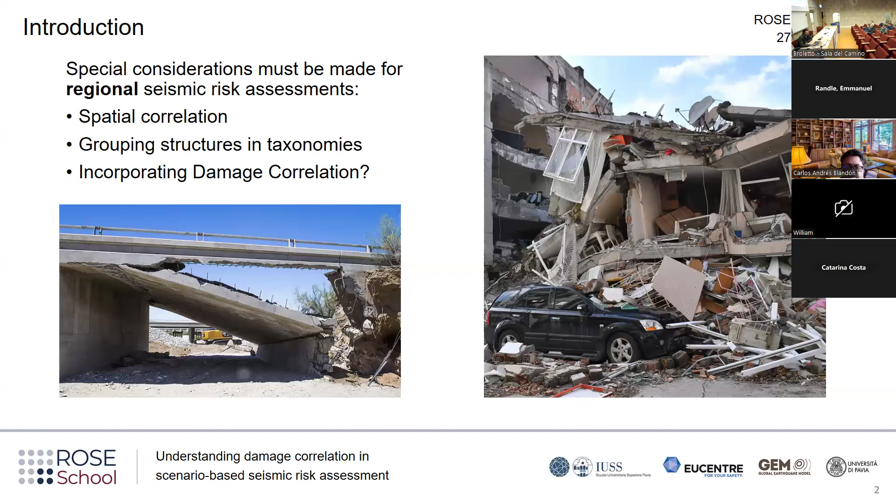We should also ask ourselves, we also need to consider some sort of damage correlation in the results, which is specifically what I'm going to be talking about today. So it is reasonable to believe that structures that were constructed in the same region probably share some characteristics in common, in a way that they might have some common strengths or deficiencies.

So for example, we can assume that there was a developer in a city that constructed many buildings. Probably the professionals involved in the construction of these buildings were the same, the building code used was the same. So as a consequence, if they made a mistake in the construction of one of these buildings, probably they also made that mistake in the construction of the other buildings. So the response of these buildings is correlated in a way - there's some dependency in the response of these buildings.

This is also very common, for example, in the case of overpass bridges in highways, because generally we can see that there's pretty much like a copy and paste of the same bridge in different sites, so we would expect these bridges to have similar responses.

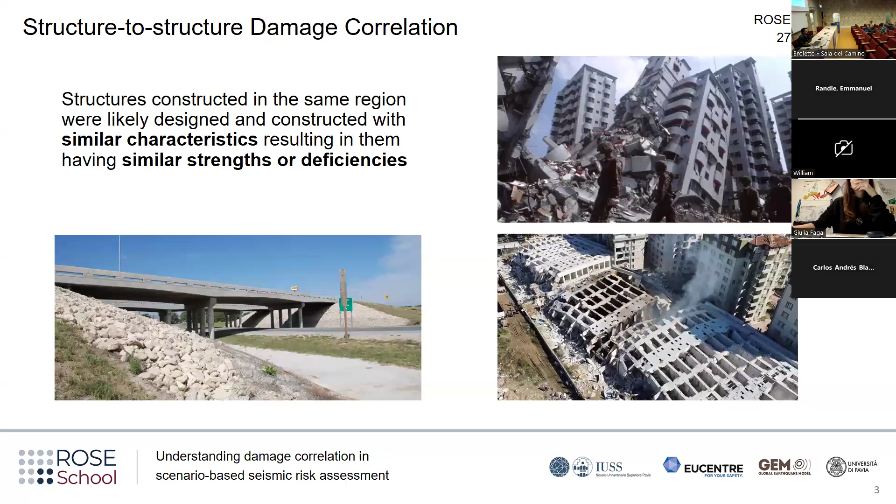The fact that this dependency exists doesn't necessarily mean that the buildings are going to have the same damage outcome. If we look at the pictures on the right, we can see that in the picture below, all of the buildings collapsed, but in the picture above, just one of the buildings collapsed. So it's not a matter of the buildings being similar meaning they will all have the same outcome. There's some sort of randomness in there, or some behavior in there, which is what we're trying to understand right now - what is this correlation, what causes this kind of behavior?

So in order to understand better the implications of considering this variable in the analysis, we will look at this hypothetical case in which we have many buildings, all of them belonging to the same taxonomy in a region, in a way that we have just one fragility function for all of them.

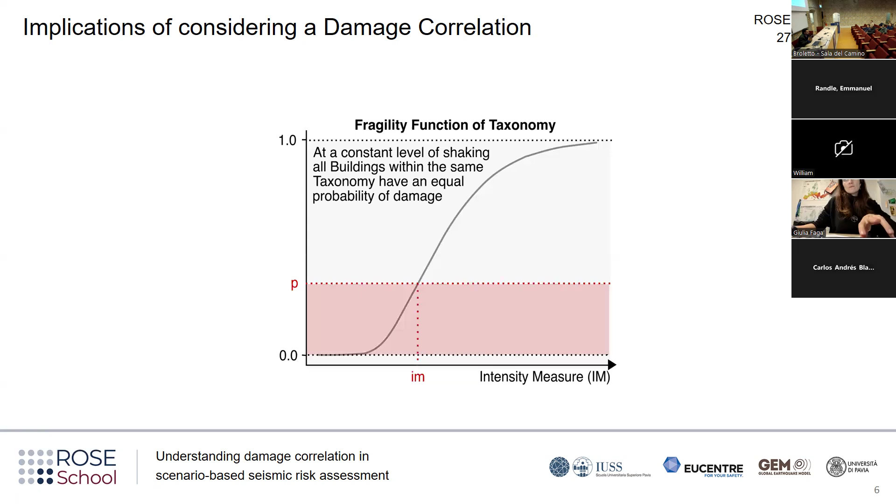If we also assume the hypothetical case that all of these buildings have a constant shaking, as if they were all located on the same site, they will all have a common probability of exceeding that damage state. Since we're considering just one damage state here, exceeding this damage state means resulting in damage.

This is how the analysis is usually performed when no correlation is being accounted for. What is done is we sample a set of n times k independent uniform numbers to assign the damage state to each of the buildings, n being the number of buildings that we're analyzing, and k being the number of trials we're performing on the same scenario.

So what is done is we just sample a random number between 0 and 1, and in this case, for example, that number is larger than p, so we say that the building is not damaged. We can do then another independent uniform number here.

This is a Monte Carlo simulation of a Bernoulli trial. A Bernoulli trial is a process in which we have two possible outcomes and one probability of observing that outcome. So that's why this is a Bernoulli trial.

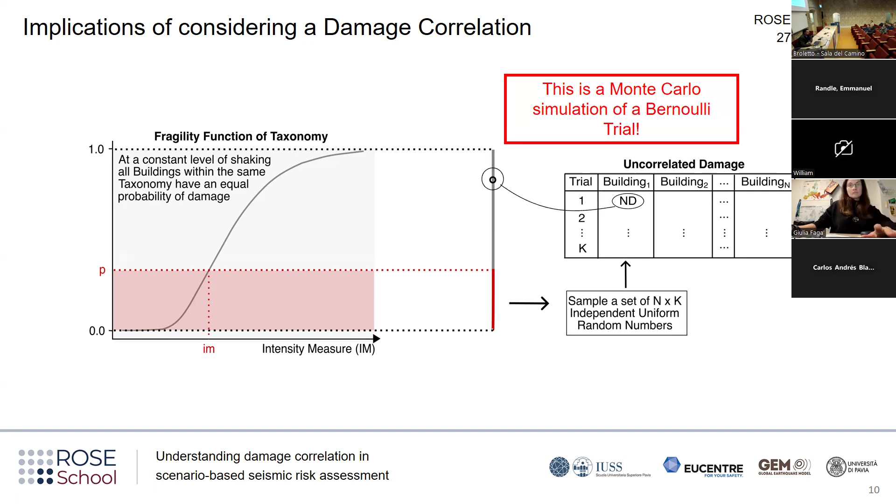As I was saying, we can generate a second independent number. In this case, if it is lower than P, we can say that the building is damaged. We can do it again with another independent number, and in this case it is larger than P, so the building is not damaged.

We can repeat this many times until we have a table like this one, which we can use to estimate losses, perform some statistics, determine the probability of exceeding a certain number of damaged buildings, etc.

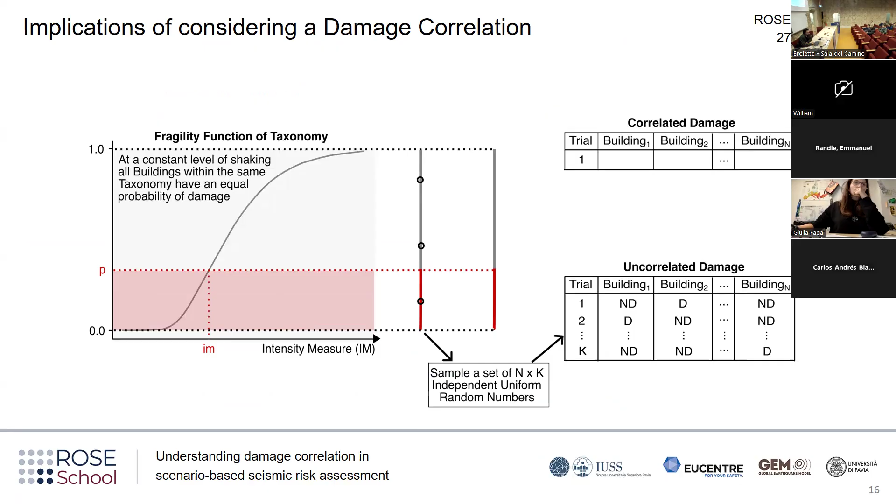Now, if we want to consider a correlated damage case, we will need to sample collectively all of the uniform numbers being used for each trial simultaneously, in a way that they represent the correlated structure of damage we expect this building to have.

So, for example, here we will generate all of the random numbers for the buildings, and we will see that all three of them result in no damage. We repeat this again for all of the trials we're running, and we get a table like the one we got before.

If we perform vertical statistics, we can see that for both cases, the proportion of trials for which any building resulted in damage tends to be equal to P. The same thing happens if we perform horizontal statistics for the uncorrelated case.

However, for the correlated case, this doesn't happen. The proportion is not going to be equal to P, since we're going to observe more cases in which either more buildings collapse, fewer buildings collapse, or maybe all of them collapse, because the response is not independent, it's correlated.

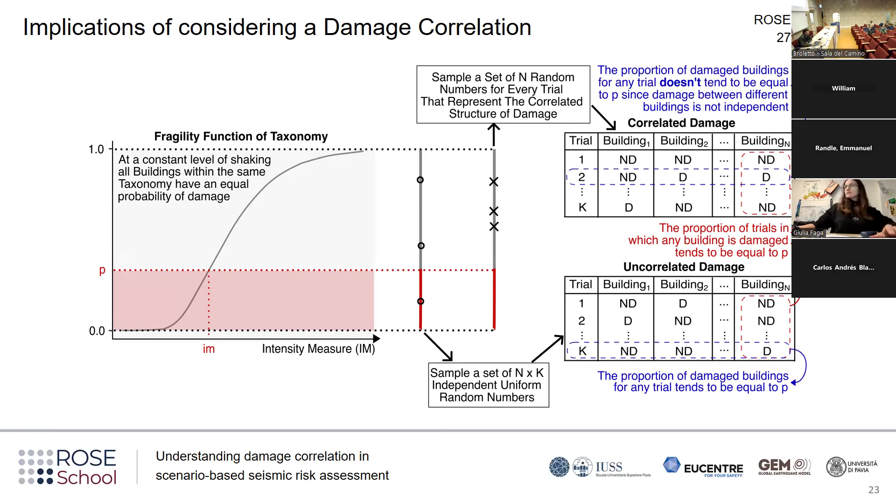Now, the question is, how can we estimate this correlation? How can we generate this set of uniform random numbers that represent the correlated structure of damage?

If you recall what I said before, the process of sampling each of these damage outcomes is a Bernoulli trial. So we could use the equation for estimating the correlation of Bernoulli trials, which is the one I'm showing on the slide. It is a function of the marginal probability of damage, in this case of each of the buildings.

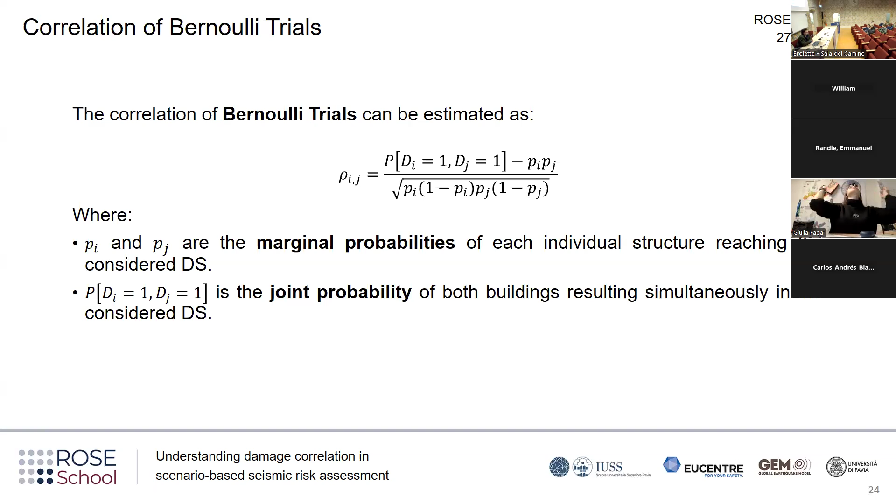So it's just the probability from the fragility function, the probability of each building independently resulting in that damage state. It's also a function of the joint probability of damage, which is the probability of both buildings resulting simultaneously in that particular damage state.

We believe we can estimate that joint probability distribution from the results of nonlinear time history analysis, either from MSA, multiple stripe analysis, or IDA, with some implications from each of them that I will discuss later, if we use the same set of records for both buildings.

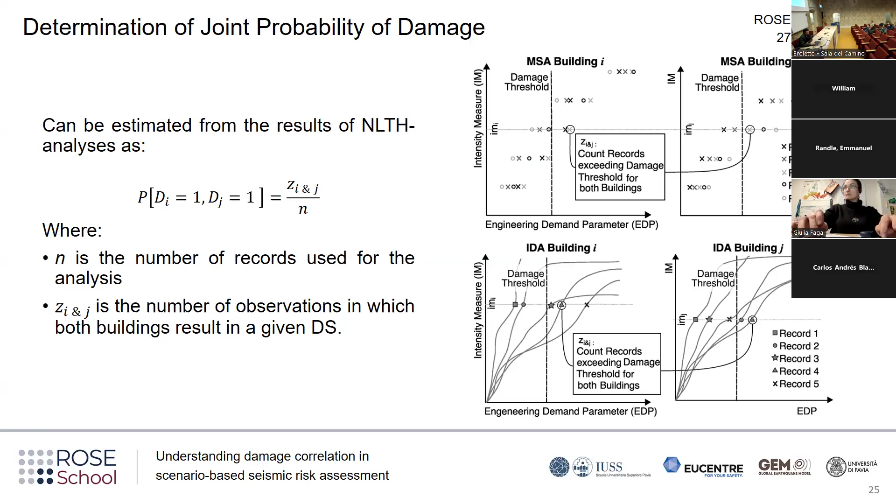We can then, as we do for determining the marginal probability of damage, count the cases for which a record caused both buildings to exceed the considered damage threshold, and in that way estimate that joint probability. I will talk a little bit later about the implications of using both methods, but that is the general idea.

So we decided to apply this in a case study to better understand the implications of including this variable in the analysis. We performed a regional assessment of mid-rise concrete frame buildings in the province of Caserta in southern Italy.

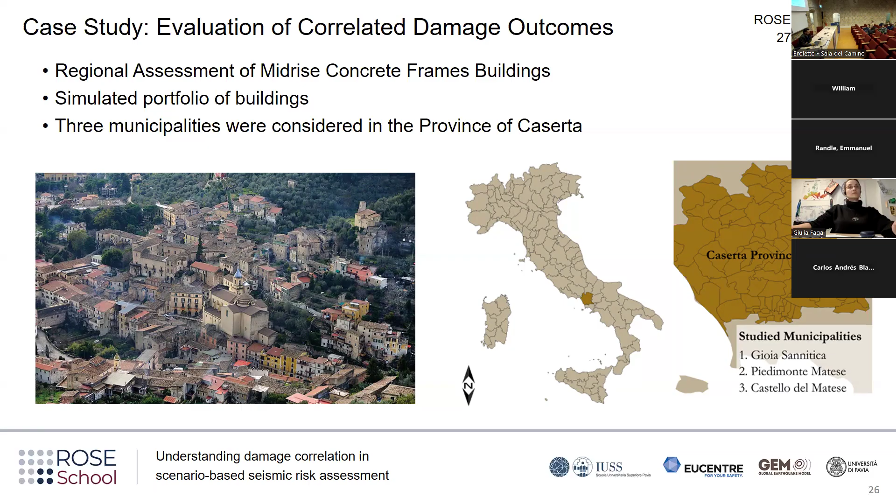We used a simulated portfolio of buildings, and we considered 3 different municipalities that share very similar high hazard: Gioia Sannitica, Piedimonte Matese, and Castello del Matese, all included in the Caserta province.

We wanted this case study to be as realistic as possible, so we took the real exposure model for these 3 municipalities from the European seismic risk model, and found there are 62 mid-rise concrete frame buildings divided into 3 different taxonomies.

The exposure model gives us all of the buildings in that municipality lumped into a common site. So we distributed them geographically using the spatial disaggregation algorithm developed by GEM, based on the distribution of the population, so we would have an assumed, realistic location of where all of these buildings could be.

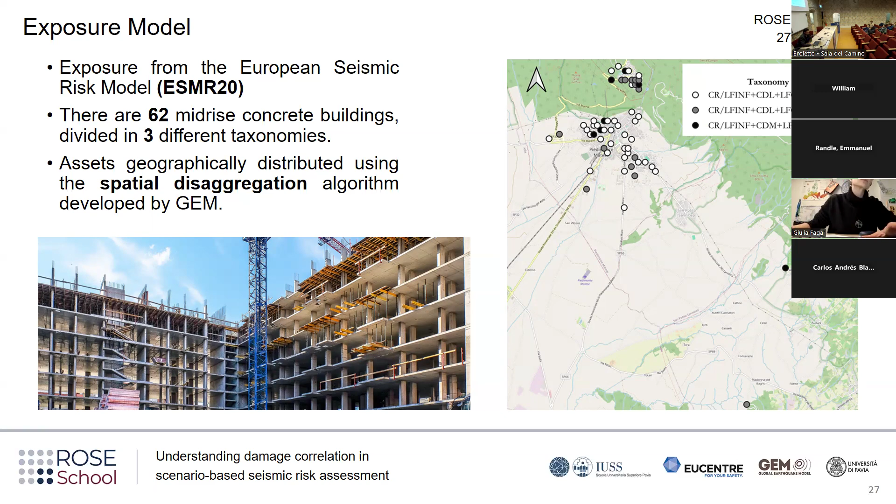We then use the built environments data design service to simulate the portfolio of buildings. It uses Monte Carlo simulation to sample the characteristics of the buildings from a real characterization of the buildings in the area, based on the characterization developed by Corlito and De Matteis in 2019, so the simulated portfolio would be as realistic as possible. We then assign a random location to each building based on the spatially disaggregated exposure model, so we have for each location a specific model of the building assumed to be there.

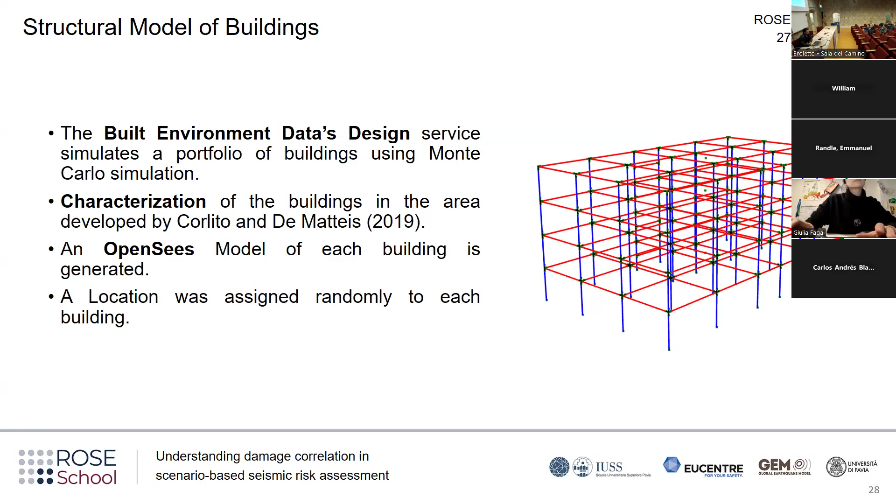We perform a hazard analysis using a PSHA on OpenQuake in order to select records for the nonlinear time history analysis. We considered many return periods, and selected 40 records for each using the conditional spectrum method. Since we needed the same set of records for all buildings, and wanted them representative for all of them, we chose as an IM the average spectral acceleration centered around the average period of all the buildings, so we could capture the possible expected ranges in the response of all the buildings.

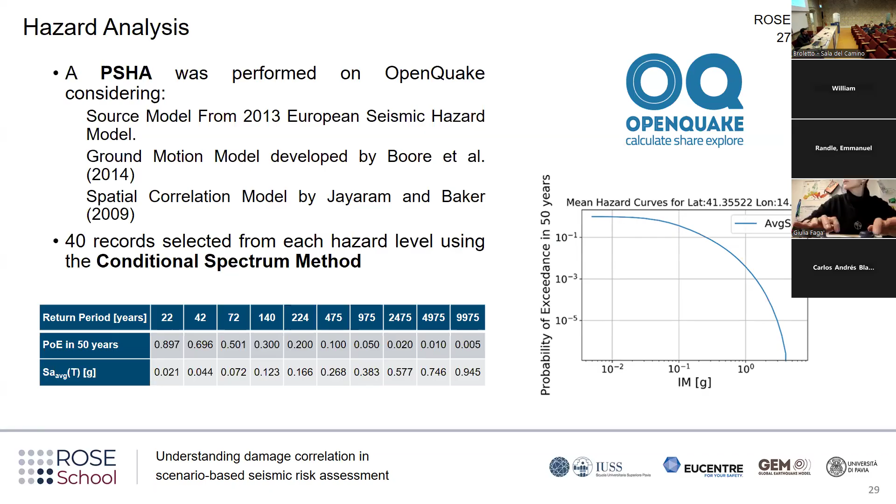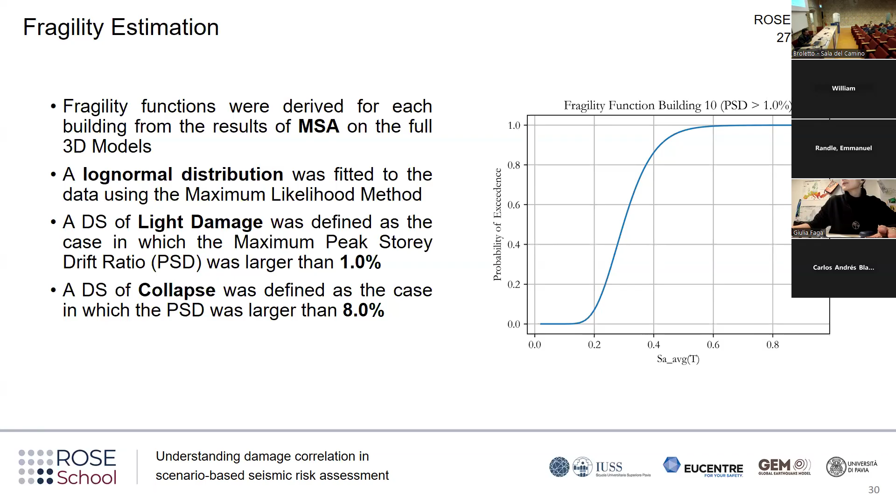For the estimation of the fragility functions, we performed multiple stripe analysis on the full 3D models of the buildings, then fitted a log normal distribution using the maximum likelihood method. We considered two damage states: a light damage state defined as the case where the peak story drift was larger than 1%, and a collapse damage state defined as exceeding a peak story drift of 8%. We derived fragility functions for all buildings in these two damage states.

We then estimated the damage correlation with the equation and methodology shown before. As I mentioned, we could use results of multiple stripe analysis or incremental dynamic analysis. Usually MSA is preferred because we use records that are hazard consistent for all hazard levels. However, this means we only have results for the obtained EDPs at some fixed intensity stripes, and the records differ for each stripe, so we cannot interpolate results between intensities. This means we could only use MSA for estimating correlations when all buildings have exactly the same intensity, coinciding with one of the intensities used for MSA.

As an alternative, we can use IDA, which might have some bias due to excessive scaling of the records, but this always happens with IDA. Since the same set of records is used for all intensities, and you progressively scale them until reaching collapse, you can actually interpolate the EDP value for any IM. This allows us to calculate the correlation for cases where the intensities in both buildings are different.

Since we're going to perform IDA, we wanted to try the impact of using equivalent single degree of freedom oscillators instead of running the analysis on the full 3D model, because that would significantly reduce the computational demand of the methodology. So we wanted to see what would happen if we made that simplification.

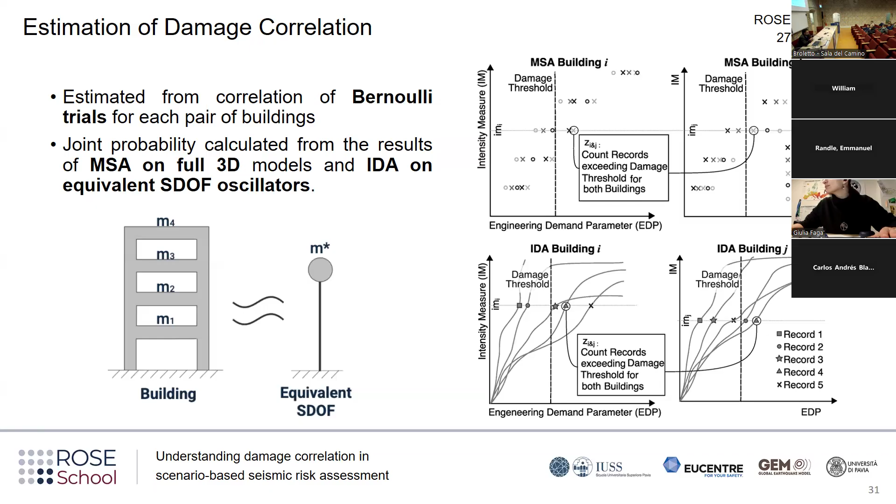To avoid excessive scaling, we chose to use the same set of records selected for the 475-year return period. So when looking at that intensity, the records used are exactly the same with the same scale factor, and the only difference in results comes from one case using the equivalent SDOFs and the other performed on the full 3D models of the buildings.

Considering that, we evaluated three different cases. The first was constant shaking with an intensity equal to 0.27 G, corresponding to the 475-year return period. This means that for this case, the only difference in results comes from the use of the equivalent SDOFs.

A second case used a higher intensity of 0.75 G, to see the difference in results when also using IDA instead of MSA. The third case was based on a rupture scenario, used to see the impacts on results in a more realistic case where intensities were different across all the buildings.

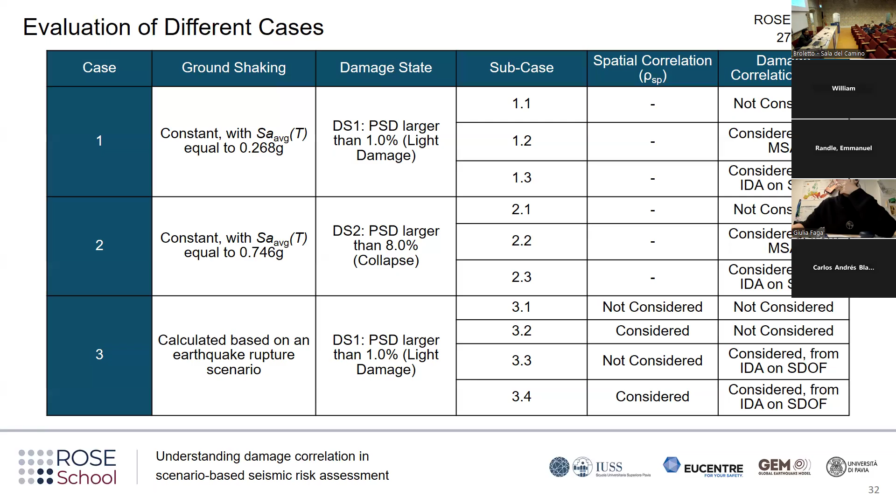For the results of case one, we estimated the probability of exceeding a different number of damaged buildings, calculated after performing 100,000 iterations of the same case. We counted how many times each number of buildings was exceeded.

The number of damaged buildings was larger than the considered number of buildings, and that's how we obtained those curves. We can see that overall, the mean value is pretty much the same, and the median value is pretty much the same. But there was a significant difference in the dispersion of the number of damaged buildings.

As a consequence, the tails of the distribution are also different. If we ignore the correlation, which is what is usually done, we underestimate the probability of observing a large number of damaged buildings. So if we look at the probability of observing more than 40 damaged buildings from this scenario, if we ignore the damage correlation, it will be around 7%. But if we consider the correlation with MSA, in this case with the full 3D models, it will be 40%.

We can see that using the SDOFs is slightly overestimating the impact of the correlation. But in any case, these results, even using the SDOFs, are better than completely neglecting the correlation, which is what is usually done. Now for case two, the results are very similar.

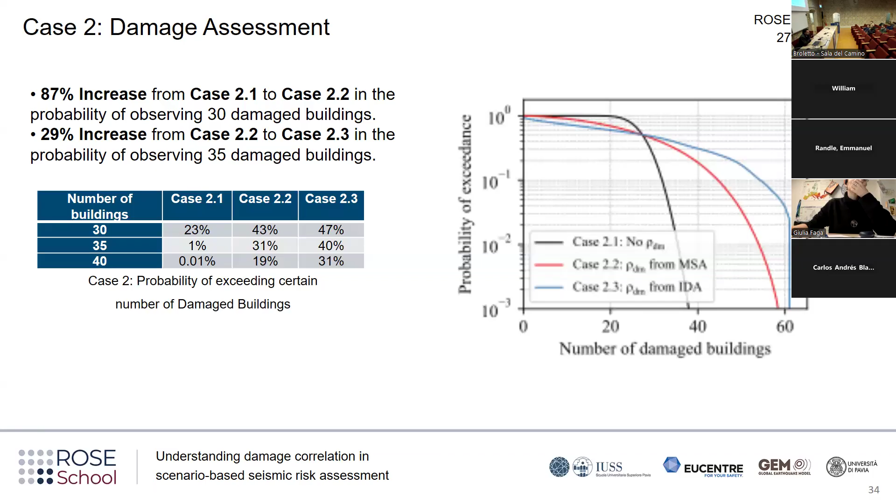Now for case three, we consider this rupture, selected from the 475-year return period hazard. Because we know that for this level of intensities the results from MSA and IDA are similar, we wanted to decrease as much as we could the impact of using a different method. This corresponds to a scenario with a magnitude of 6.25 located at 5 kilometers from the point of mean coordinates of the buildings.

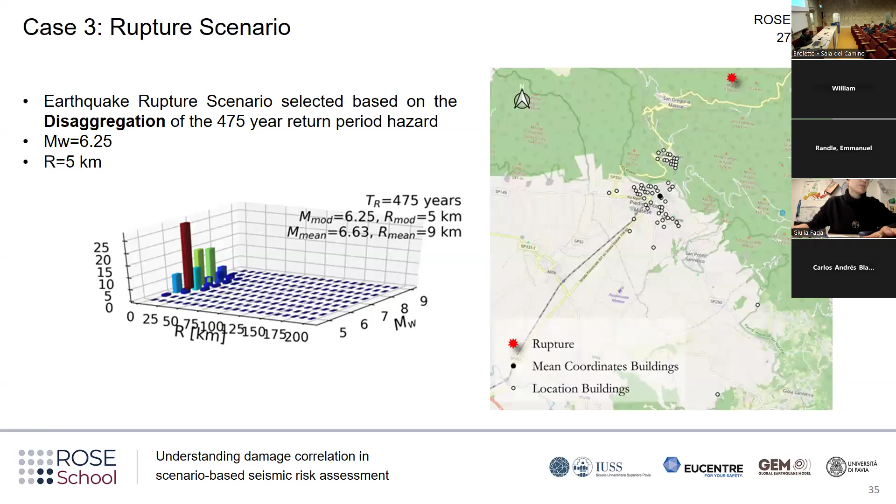For this case in particular, we saw that spatial correlation has a very big impact, probably because all of our buildings are located too close to each other. So spatial correlation is very significant, but in any case, we can see that there's also an impact if we consider just the damage correlation by itself.

It's important to consider the correlations because, for example, the government of the province might see this as the worst case scenario and say that they are prepared to fix 45 buildings. And they want to know how likely it is that that money is enough.

If no correlation is used, the probability of them not having enough money would be around 6%, so they might say that it's fine. But if we consider all of the correlations, that probability might increase to 36%, which maybe is not that fine anymore. That is why it's important to consider both the spatial correlation and the damage correlation into these type of assessments.

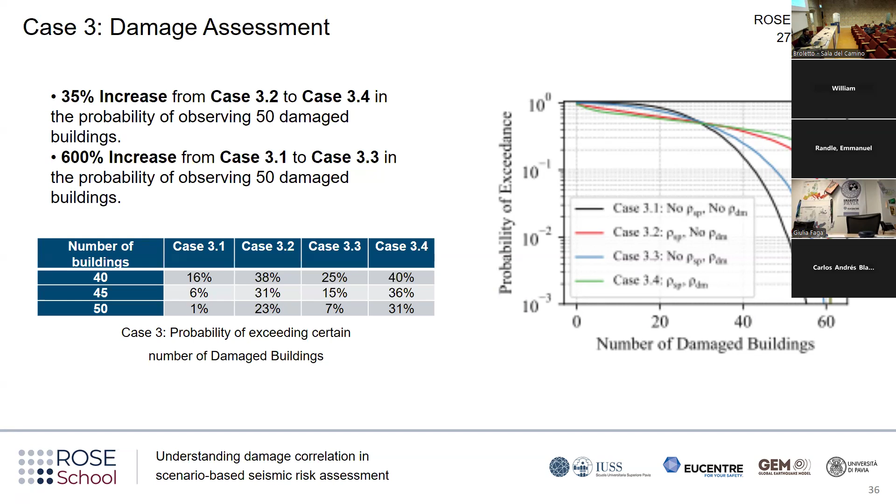So as a conclusion from this study, we can say that incorporating the damage correlation significantly impacts the variability and shape of the distribution of number of damaged buildings. Including this variable also allows us to have more accurate results in order to plan for mitigation strategies and for risk preparedness awareness.

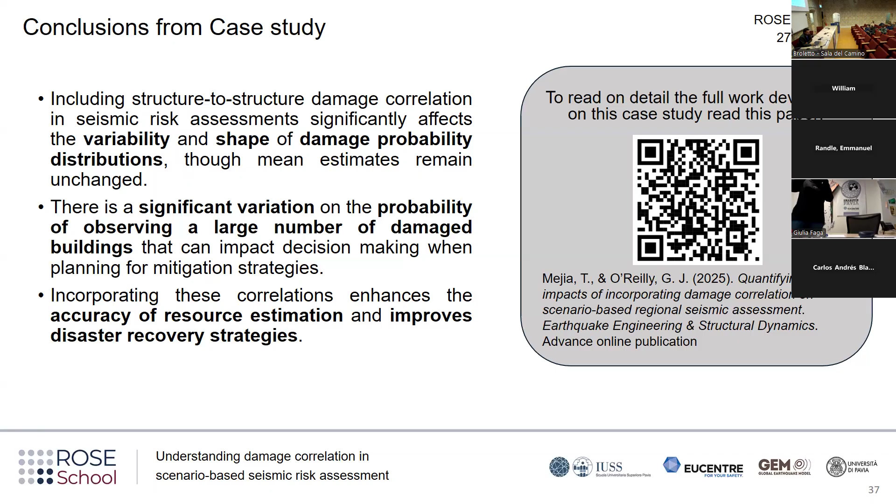Now let's talk about some of the considerations from this work in order to see how we can move forward. The first thing is that we found that for some cases there were negative correlation values, which is a little weird because we're working with buildings that have very similar dynamic characteristics and behavior.

So we should look further into why we're getting these negative values, maybe it's an issue of needing more records to quantify the general probability distribution. The second issue is that this methodology was based on a building-specific approach, assuming we have nonlinear models of all the buildings in the region, which we know is not very realistic, and we don't have these nonlinear models. So we would have to develop mathematical models to estimate the correlation directly from building characteristics. However, this can be very complicated because we need to guarantee that the correlation matrix obtained is positive semi-definite, a property of correlation matrices meaning all eigenvalues are larger than or equal to 0, and achieving this from these matrices might be quite complicated.

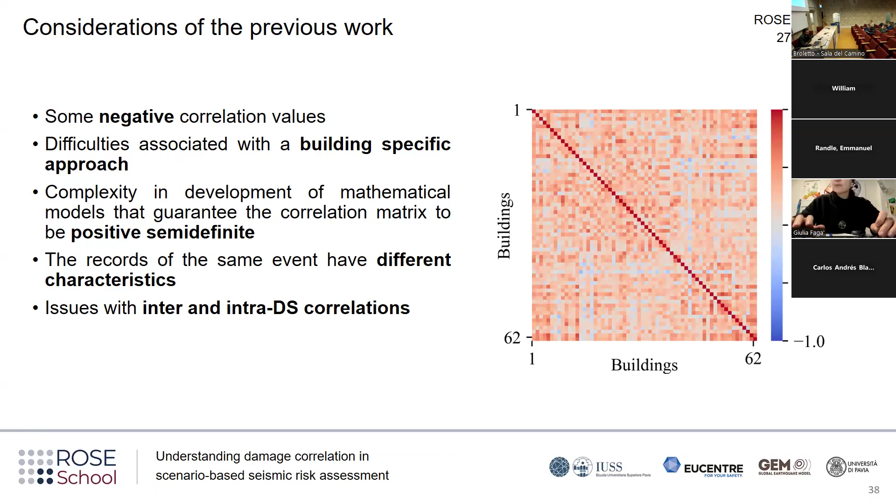So for that, we consider using an EDP-based approach that is equivalent to the traditional damage state approach. In this approach, we sample the EDP directly for each building from a given probabilistic model of the EDPs. After sampling the EDP value, according to which damage threshold was exceeded, you can assign the corresponding damage state for each building, or you could also estimate directly the losses with a story loss function, for example. By generating a set of correlated EDPs, we would intrinsically be considering all types of possible correlations between all the different damage states.

One of the drawbacks of this approach is that you need the probabilistic model of the EDPs. If you're deriving the fragility function from cloud analysis, for example, an intermediate step is developing a demand intensity model, which is a probabilistic model for the EDPs. So even though it might not be published, we know it exists. But if you're working with empirical fragility functions, we don't have such a model, maybe for all the taxonomies. Let's say that for now we're going to consider that we have the demand intensity model for all the buildings and all the taxonomies.

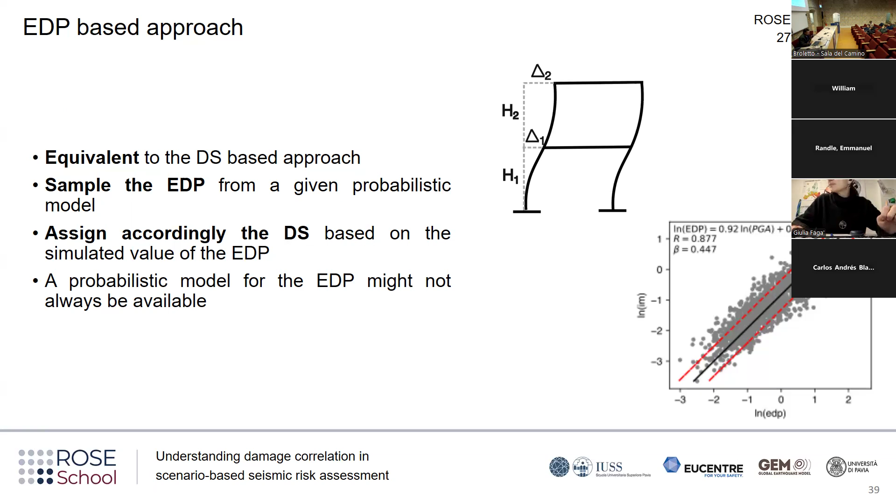So now, in order to understand how we can deal with the problem, let's try to see what would be the ideal approach for estimating the correlation. Let's say we know that the rupture we're seeing on the slide is one of the ruptures we need to consider in our scenario-based assessment. Let's say also that we have all of those sites, but specifically two buildings, building A and building B, located on site N and site M, respectively.

Let's also consider that building A and building B are instrumented, so we can know when an earthquake occurs what was the actual observed EDP in that building. So let's say we had this rupture and recorded the observed EDP on both buildings. Now let's say we can have another realization of exactly the same rupture, and we could also record the observed EDP for that new realization. If we repeat that many times, we end up having a vector of observed EDPs on both buildings for that specific rupture.

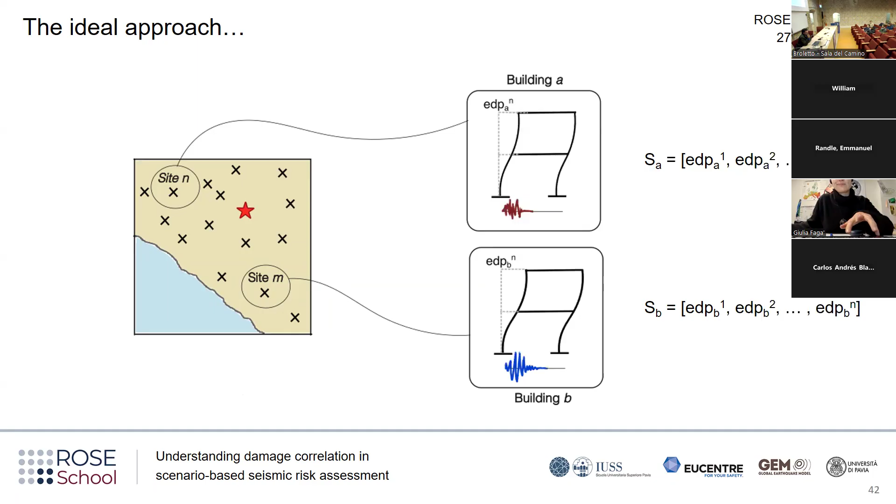We could then estimate the Pearson correlation of those two vectors, giving us a real calculation of what is the correlation in the EDPs of those two specific buildings located at those two specific sites for that specific rupture.

We could repeat it then for all of the buildings, so we will have a correlation matrix of all of the buildings in our region for that rupture in particular, and then we could repeat it for all of our ruptures. In reality, this is not applicable because, first of all, we don't have many different realizations of the same rupture. We just have one. Also, we don't always have buildings that are instrumented, so we cannot estimate the correlation from that. So it's practically impossible to use this ideal approach.

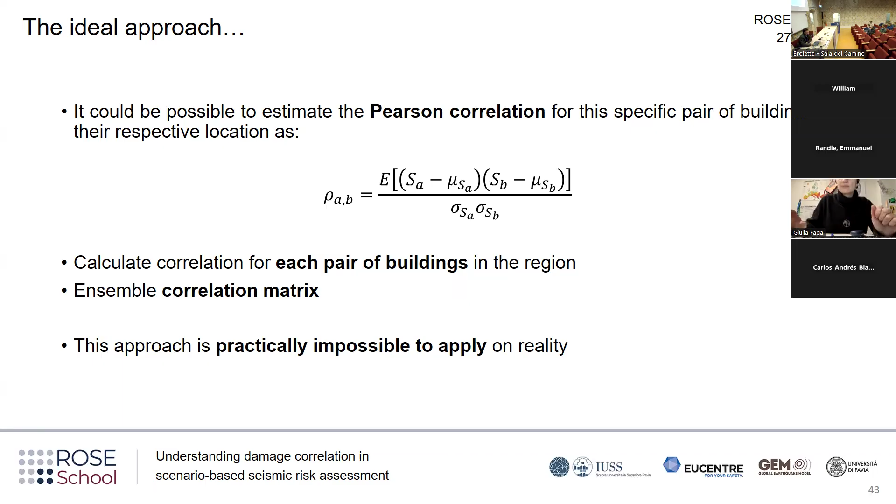This is why it is ideal. This is equivalent to what is done in spatial correlation problems. Also in spatial correlation, we would like to have many observations of the intensities in our sites for the rupture we're considering. How they deal with that in spatial correlation, since they also don't have those observations, is by relying on the ergodic assumption.

What that does is consider that the residuals of IMs observed at different earthquakes, locations and times have properties equivalent to the ones you would observe on many observations in time of a given event at two specific sites. So they rely on that assumption to develop mathematical models of the spatial correlation that are generally a function of distance.

To understand it better: if we have two sites separated at a distance of 1 kilometer, the correlation in the residuals of the intensities of those two sites is going to be similar to the ones you would have in many other sites also separated at 1 kilometer for many other earthquakes that happen in many other regions. So they use those observations of earthquakes in other regions to estimate the correlations in the region they would like to have it.

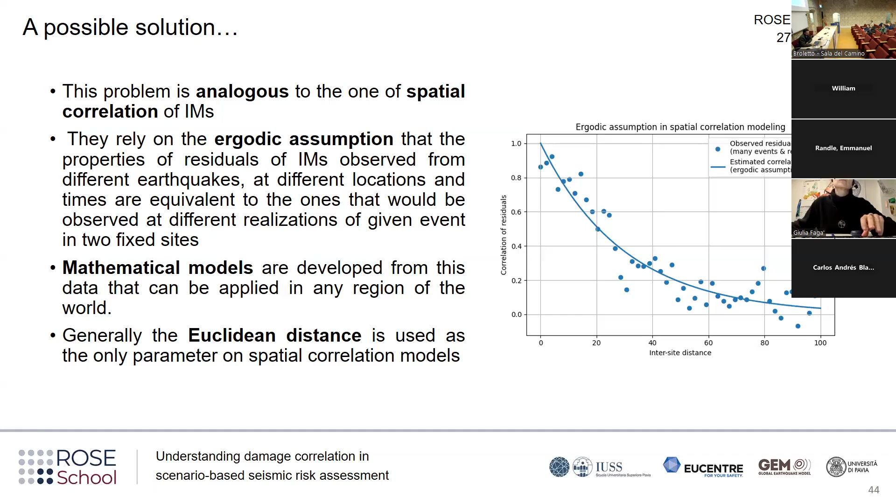So we could also rely on this assumption for the estimation of the correlation in the performance, or in the EDPs. If you heard, I talked about the residuals of the intensities. So it's important to say what these residuals are - they are a variable that represents how many standard deviations from the mean an observed value is.

Then you have a probabilistic part, that is a function of the residual multiplied by the dispersion of the demand coming from the demand intensity model. So these residuals are usually considered as standard normal variables, so they have a mean equal to 0 and a standard deviation equal to 1.

It is important to consider the correlation of the residuals instead of the correlation of the absolute values, because by correlating the absolute values you can inflate the value of the correlation - you might be observing two points that have very similar response because the mean is similar, because the expected value is similar, but not necessarily because the random part was similar. So by correlating the residuals directly, we are accounting for that.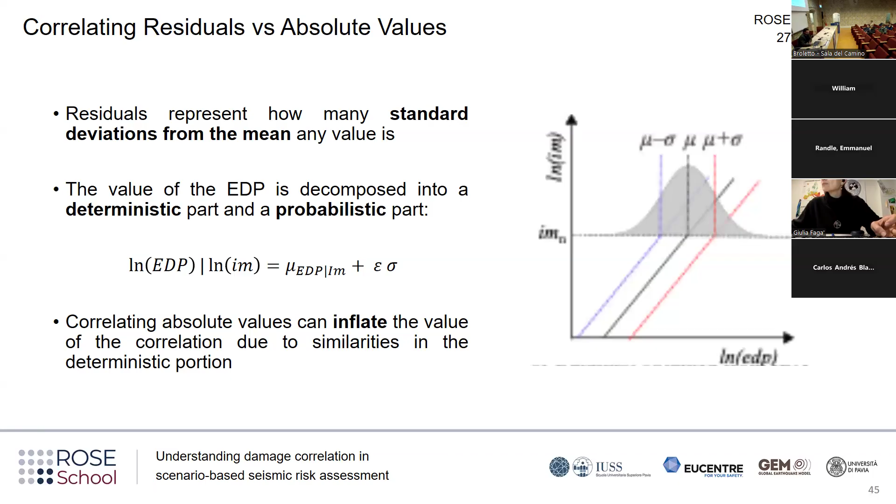As I said before, we could use the ergodic assumption to estimate the correlation of the residuals of EDPs. For that, we could use real observations of real earthquakes that we might find. So for example, let's say we have this earthquake and we have many stations that recorded it, and we have a specific record for each of those stations. So we also know what was the actual intensity in that site.

If we take, for example, one building, let's say building A, and we have a nonlinear model of that building, we can perform a nonlinear time history analysis on that model for all of the records from all of the stations that we have for that rupture in particular. And in that way, we will have for each station a pair of intensity and observed EDP for that building. We can then use that.

If we then have a demand intensity model of that building and we develop that model, we could calculate what is the residual at each of those stations. So we would end up having a map for a specific earthquake of what was the residual of that building.

And we can then use some geostatistical tools to derive, for example in that case, a model that is a function of distance. So we will know, if we have the same building located on different sites at a certain distance, what will be the correlation of that same building.

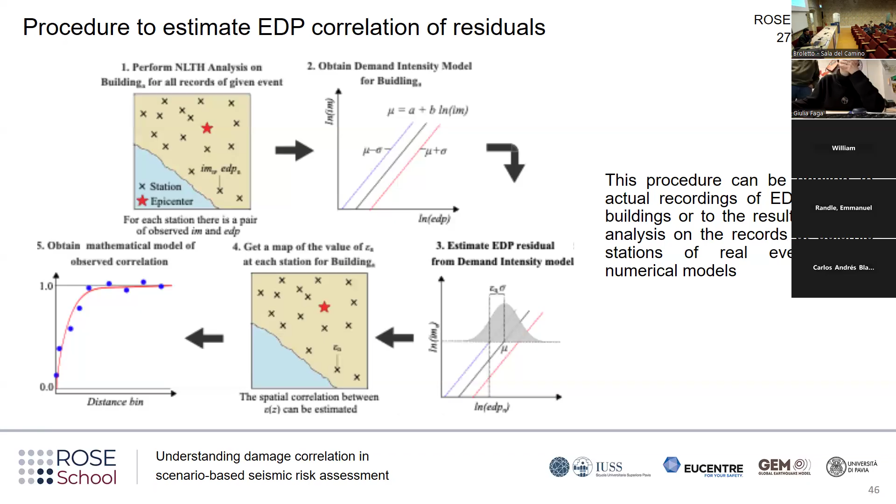We wanted then to try with an example to see what the implications would be of using this EDP-correlated based approach. So for that, we took a simulated portfolio of 80 buildings, all of them Turkish buildings with high ductility, constructed between the year 2000 and 2018. They were also obtained with the BED design service, the same one I used before, but with some modifications performed specifically for Turkish buildings by Serkan, another PhD student here.

We then performed a cloud analysis on all of these 80 buildings using equivalent SDOF nonlinear oscillators, and we used 500 records that were selected with an unconditional approach. We scaled them two more times to obtain more points in the nonlinear range. In that way, we derived building-specific demand intensity models for each of the buildings. I'm showing you, for example, the demand intensity model for building 50, and we did that for all of them.

Then we combined all of the demand intensity models to obtain a demand intensity model for the whole taxonomy that accounts both for the intra-building variability, which in this case is just the record-to-record variability since we didn't consider any other source, and the inter-building variability, to account for how different the results could be given variability in the characteristics of the buildings.

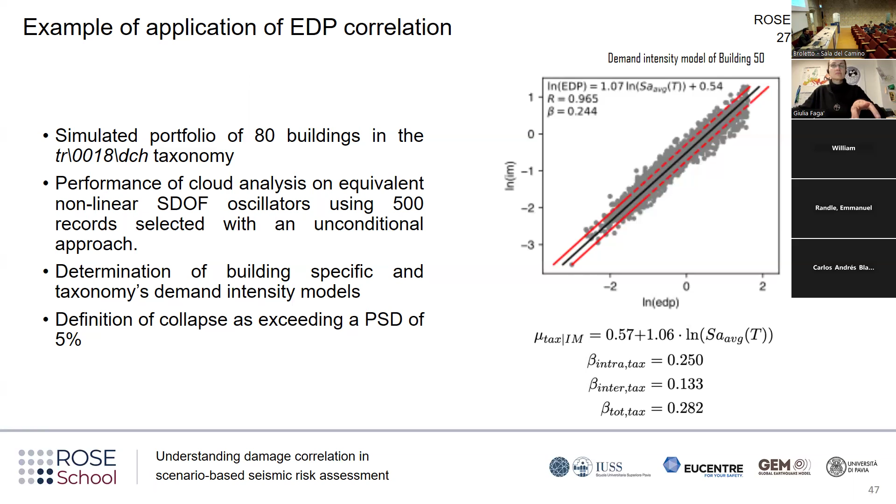As I said before, these demand intensity models are conditional on non-collapse, so the collapse cases must be considered separately. For that, we developed a collapse fragility function for each of the buildings specifically. We fitted the equation shown, performing a logistic regression to fit the A0 and A1 parameters to the data that resulted in collapse from the cloud analysis, and with that equation we found the parameters of the fragility function.

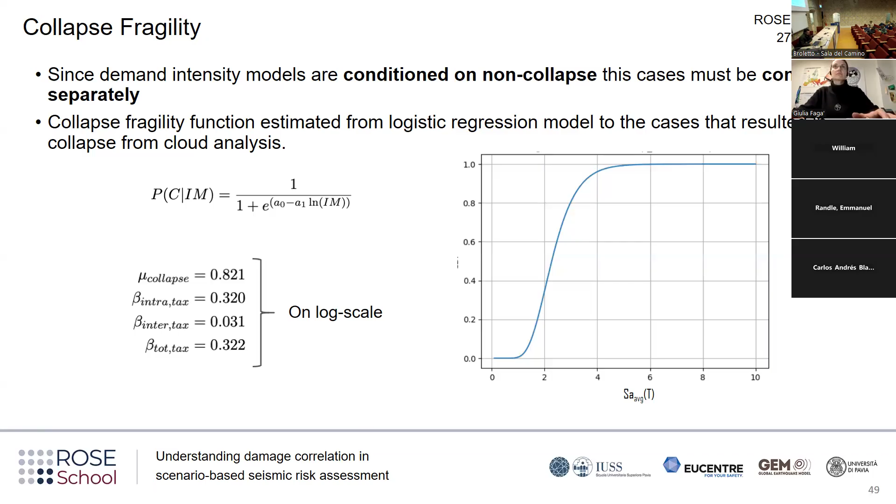And also in this case, we combined all of them into a taxonomy-level fragility function, considering both the intra- and inter-building variability.

We did the assessment for the Chichi event that happened in 1999 and had a magnitude of 7.6. Since this event has many, many records, like 400 records of the real experienced time history, we performed a nonlinear time history analysis on all of our 80 buildings using all of these records. In that way, we could obtain the residual EDP, which in this case is PSD, for all of our buildings.

In this case, what we did was just assign to each of those stations a random building in a way that we could have a real simulated, but realistic damage situation. So we will know for each of the buildings located at each of the stations what was the actual observed PSD.

We consider then for the assessment these correlation models. For the collapse cases, we consider one that is a function of the Euclidean distance between the buildings and the absolute difference in the periods of vibration of the buildings. And for the non-collapse cases, we consider one that has these two variables in addition to the absolute difference in the yield acceleration of the buildings, and one that is just a function of the absolute difference in the period and the absolute difference in the yield acceleration.

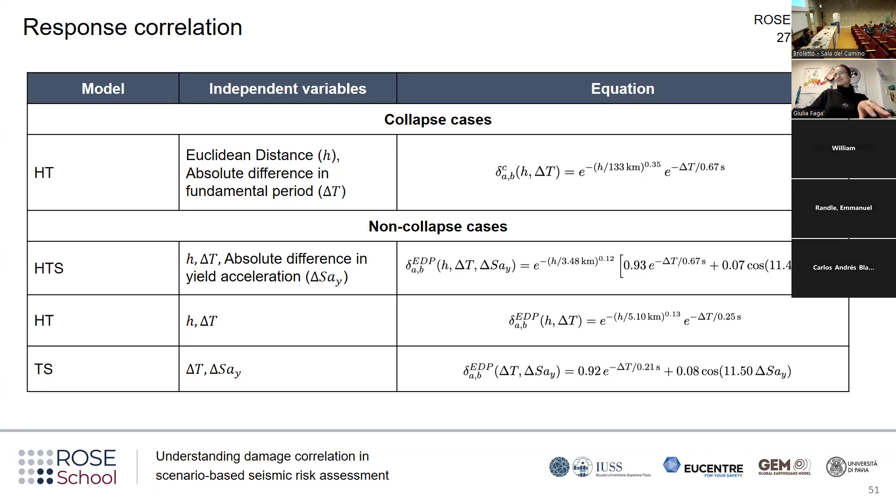I will not discuss right now where these models come from. Let's just say that these are the sort of models that we would expect to use in this type of assessments. And these models guarantee that the resulting correlation matrix is positive semi-definite. So they satisfy that condition.

We performed then the damage estimation. We use the real ground motion field of the Chichi earthquake. So here we're not considering any source of variability in the ground motion fields. We're using the real intensities that were recorded for that event. And we are just doing the assessment for the damage outcome of the buildings.

So we consider a damage threshold of 0.5%. What we did was, just for the real damage, like I told you before, we consider a random building located at each of the stations. We just checked how many of those buildings were exceeding a PSD of 0.5, and that's what we're considering as the real damage case. We found that was 75 buildings.

Then for the assessment, we just sampled the EDPs of all of the buildings and the collapse cases of all of the buildings, and we're estimating the probability of exceedance, as we did in the first case study. So we can see that the probability of exceeding the real damage that we observed, when no correlation is considered, is 0.25%, which is very low. It's almost like we would be saying that observing the real damage was impossible.

But if we consider the HT or the HTS correlation models, that probability increases to 20%. So the real observed damage becomes more likely to occur. And if we consider the TS model, it increases to 30%, which is even higher. However, we can see that the TS model is very correlated because we're not considering any decrease in the correlation with the distance of the buildings.

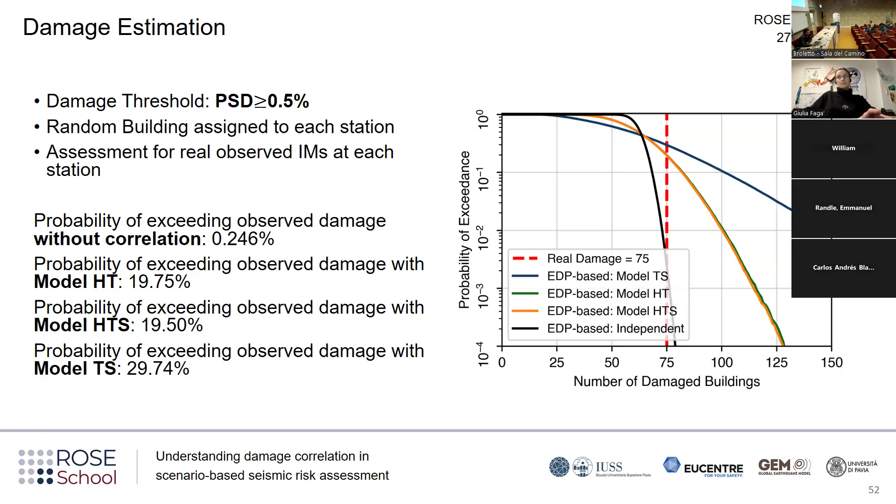So the ongoing work, what we have to do right now, is actually develop the models for the EDP residuals or the collapse cases, for example. Again, we need to guarantee that these models yield a positive semi-definite correlation matrix. And right now we're testing the use of Bayesian inference to fit these models, considering multiple variables.

As a spoiler, the models I used for the assessment actually come from some testing we're doing right now with this Bayesian inference. So they don't come from nowhere, but I didn't want to talk right now about how we developed them because it's still ongoing. We're still tweaking some things.

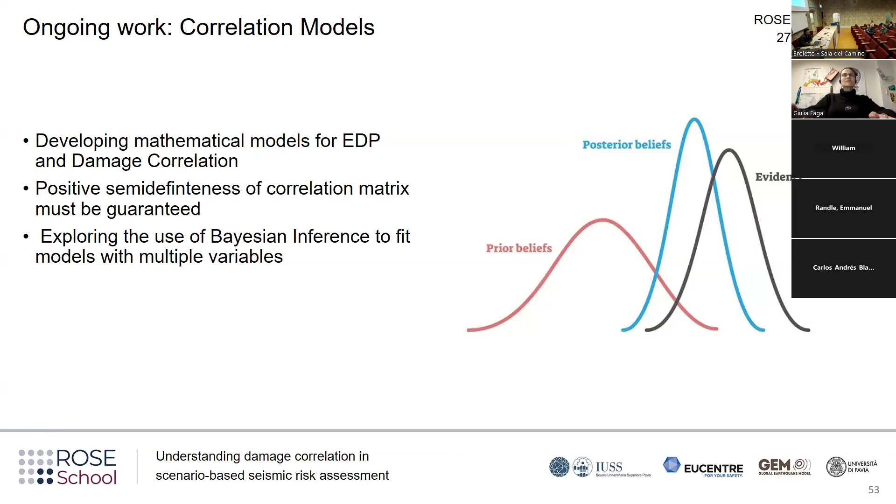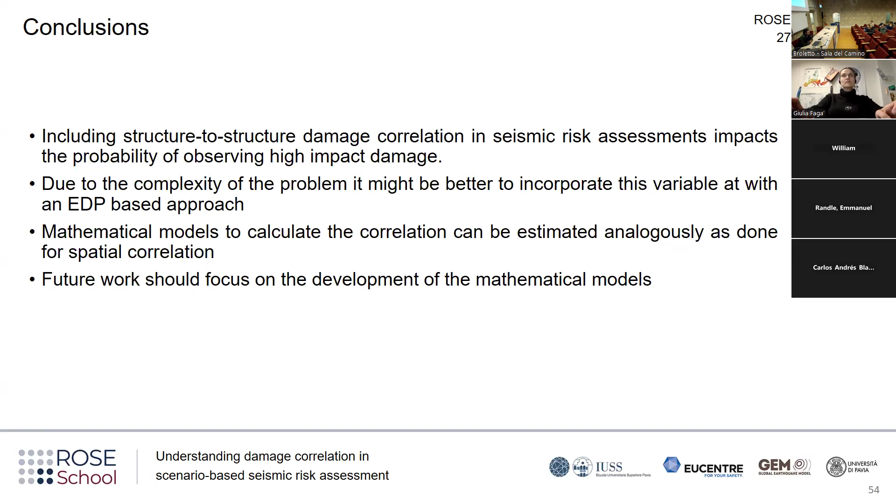As a conclusion then, incorporating structure-to-structure damage correlation in seismic risk assessments really impacts the probability of observing high impact damage. Due to the complexity of the problem, it might be better to incorporate this variable with an EDP-based approach instead of the traditional damage-based approach. We need to develop mathematical models to do it, and they can be developed in a way analogous to what is done for spatial correlation. Some future work should focus on the development of these specific models.